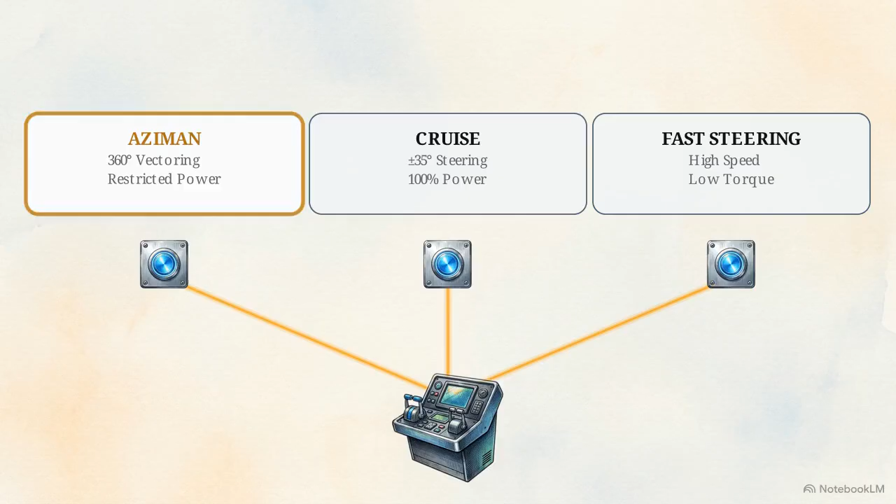The primary inputs on this console dictate how the ship steers and powers itself, relying on three specific mode selections: Aziman, Cruise, and Fast Steering.

Selecting the incorrect mode during alongside maneuvering poses a severe safety hazard, threatening both the vessel and the surrounding port infrastructure. These buttons do not pull mechanical cables, physically actuate hydraulic valves, or throttle fuel.

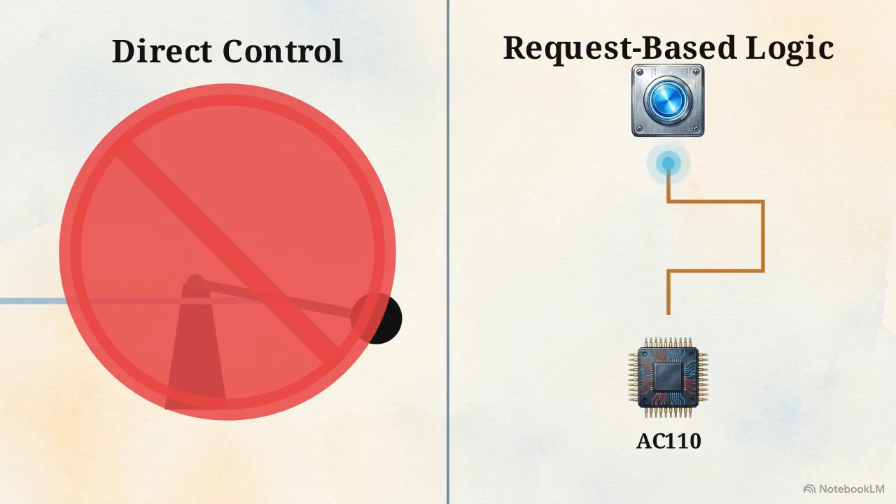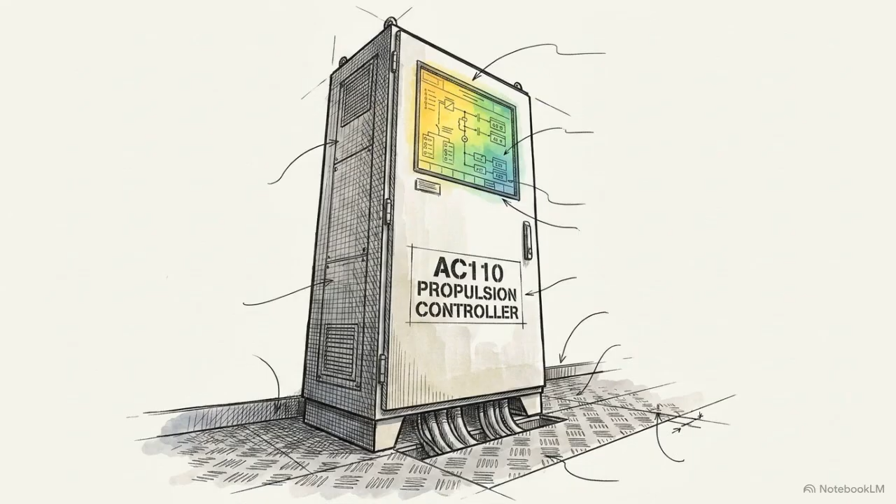They submit a request. The true authority over the vessel's movement resides in the AC-110 propulsion controller, a master logic cabinet standing between the bridge's request and the physical plant.

The AC-110 intercepts every command. It identifies which operational mode is currently active, calculates the safety parameters of that specific mode, and applies strict automated physical envelopes to the propulsion hardware.

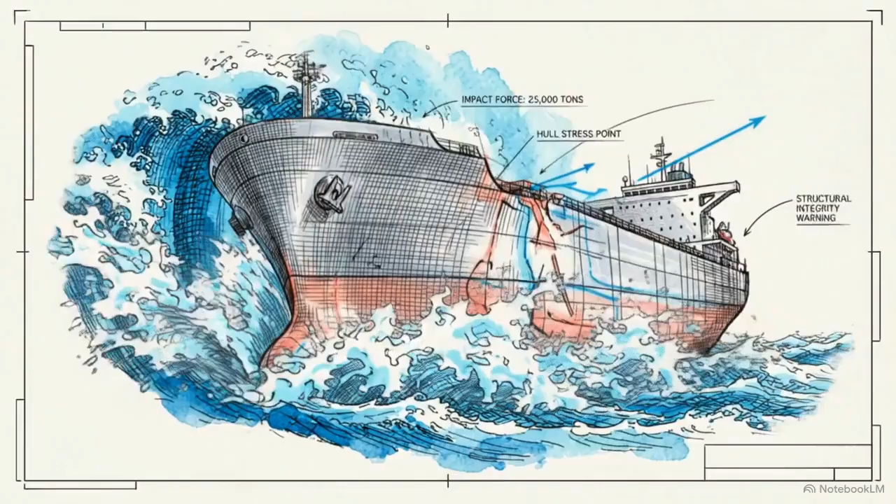This intermediate automation layer exists to ensure that human error at the helm cannot inadvertently tear the ship apart under hydrodynamic stress or destroy harbor infrastructure with a massive power surge.

Understanding exactly how the AC-110 calculates and enforces these operating envelopes marks the dividing line between a basic component operator and a principal marine engineer.

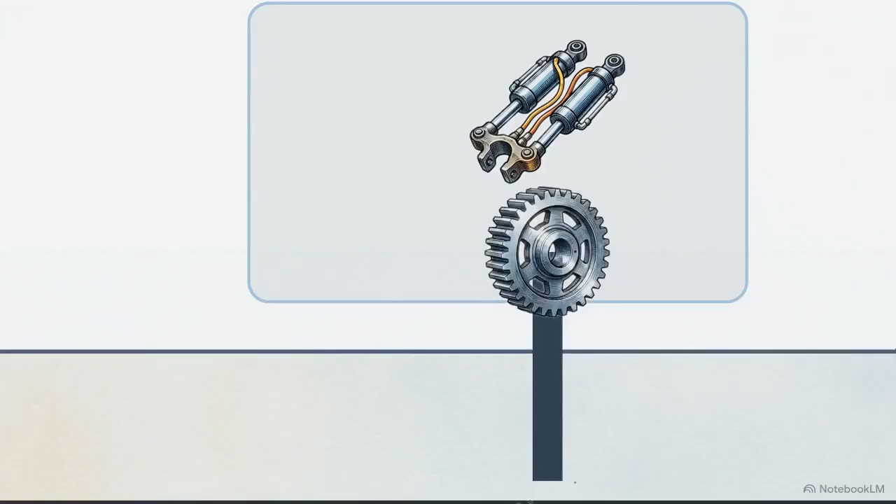Before analyzing software limits, engineers identify the hardware fallback, the Azipod room, situated directly above the submerged unit. This compartment houses the raw mechanics: hydraulic steering gear, slewing wheel, and winch motors. Adjacent is the AIU, housing ASU30X-D servo controls and override levers.

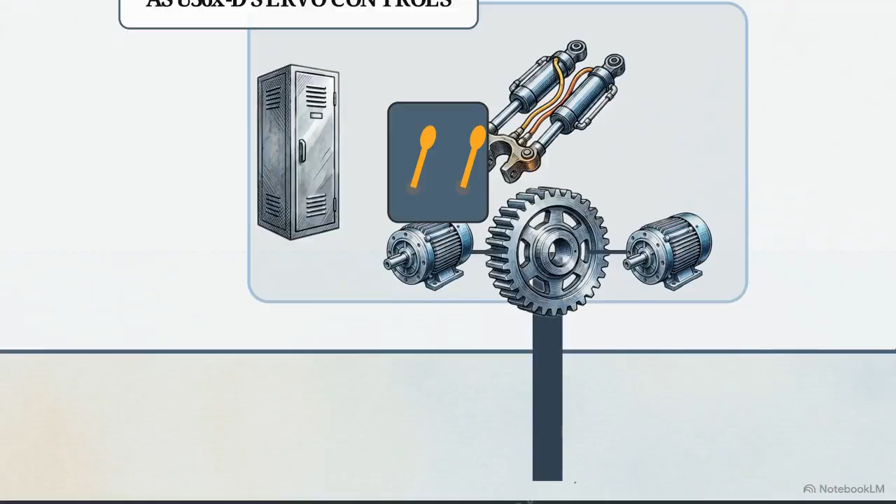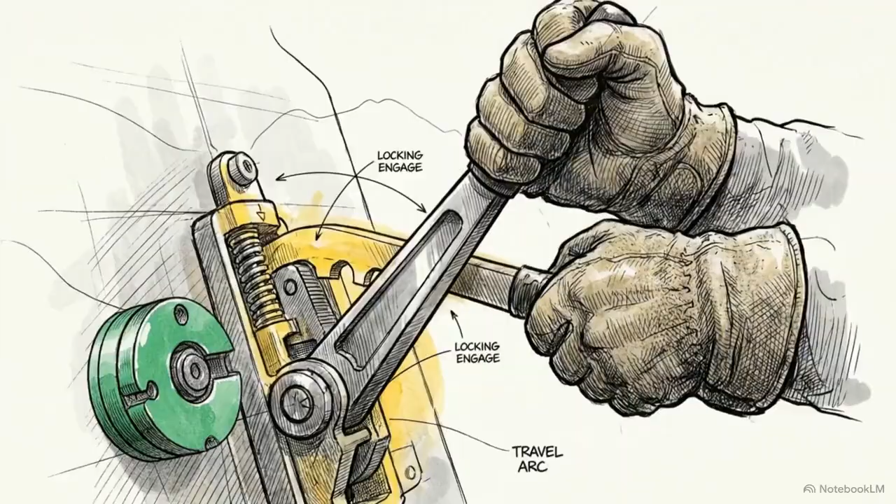If the bridge's remote control network fails or the AC-110 logic crashes, all operational command safely routes to this specific room. Engineers in the Azipod room physically bypass the AC-110, using the local interface to directly actuate steering hydraulics and manipulate propeller RPM. The control hierarchy is absolute.

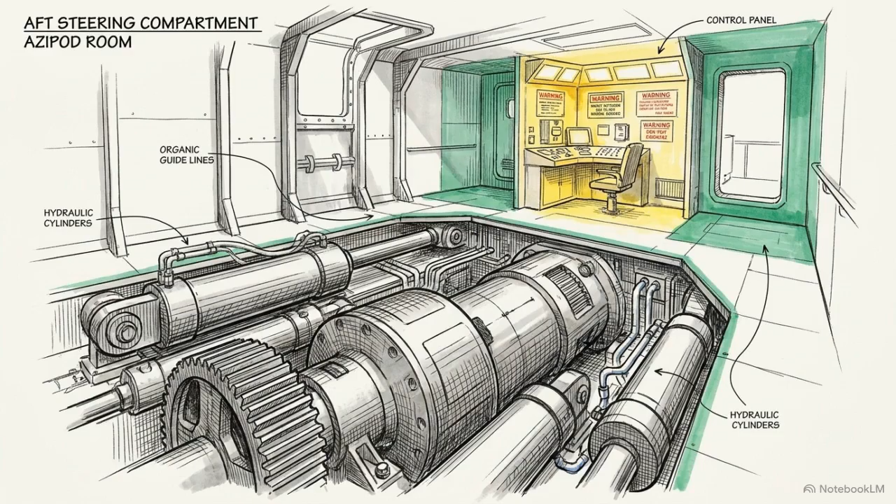A local hydraulic or electronic override initiated here strictly supersedes any command sent from the bridge. Automation logic manages the ship's routine transit, but the Azipod room provides the mechanisms for direct manual control of the propulsion plant.

When that vessel approaches a harbor, the operating environment shifts to tight, high-risk confines near concrete berths and assisting tugs. To navigate this space safely, the bridge selects Aziman, which stands for Azimuthing Maneuver Mode.

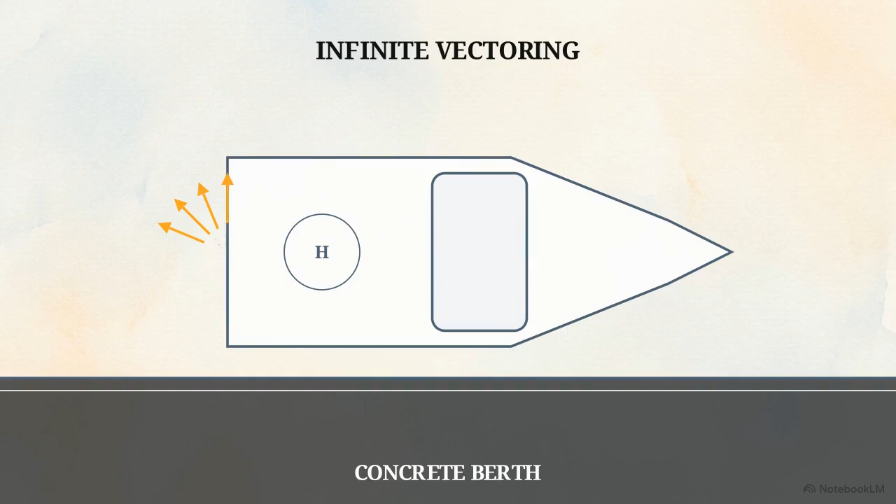This top-down schematic shows Aziman in action. The system enables absolute directional freedom, authorizing the pod to rotate a continuous 360 degrees, vectoring thrust in any direction.

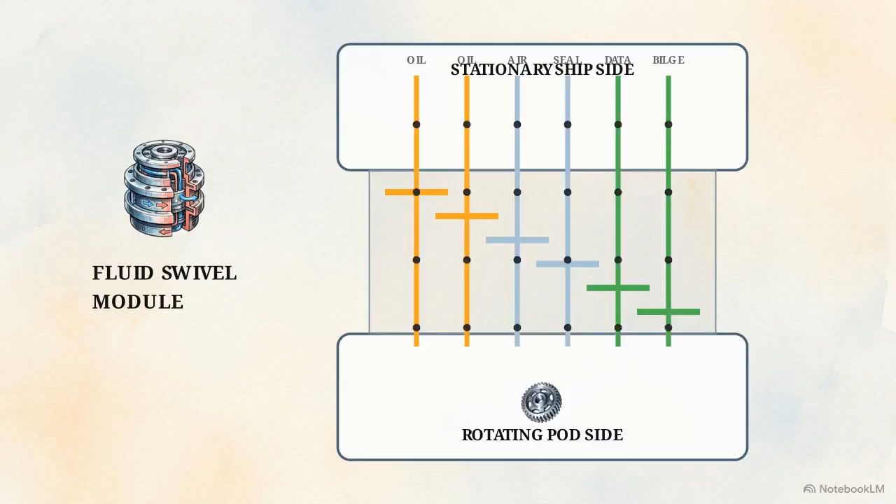This is mechanically enabled by the fluid swivel module, maintaining unbroken hydraulic and data channels during endless rotation.

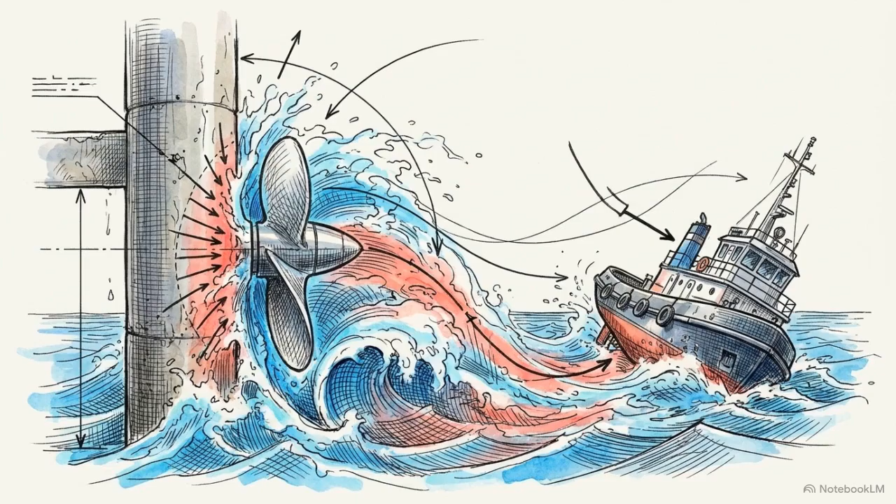Infinite rotation introduces a critical danger. If the pod is aimed sideways toward a berth, a sudden surge of full nominal power would generate extreme propeller wash, destroying tugs, docks, and nearby structures.

To prevent this, the AC-110 applies an automated safeguard. This chart tracks allowable power. In Aziman, the system permanently caps maximum propeller power output below the physical limit.

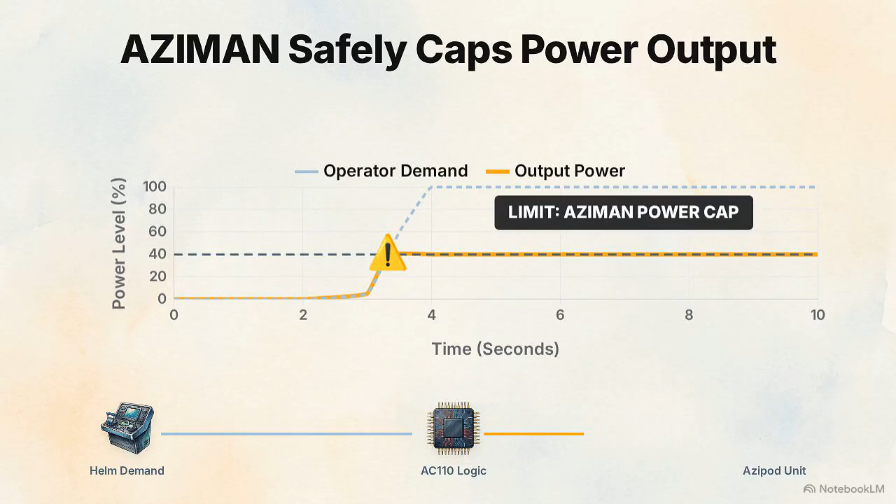Even if an officer slams the helm to 100%, expecting immediate power, regardless of the operator's intent, the automation system categorically denies that full power request.

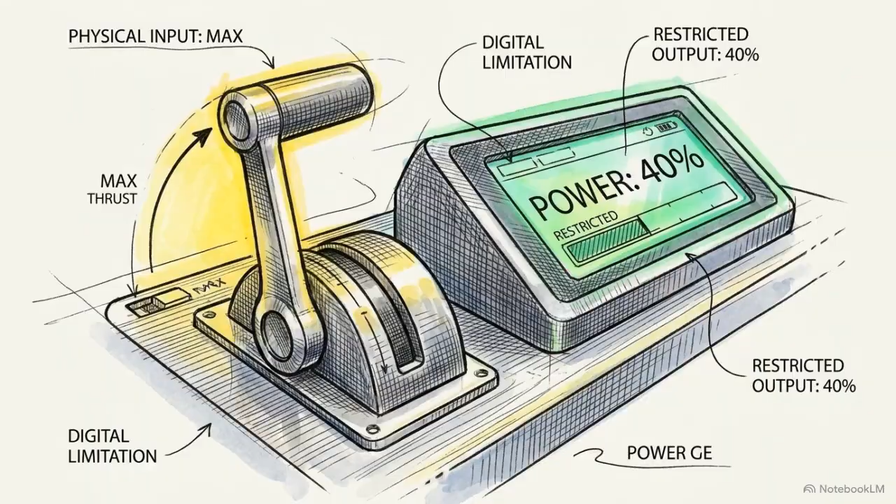This restriction is hard-coded safety logic, deeply embedded in the system. The operator cannot manually override it from the bridge console. Aziman intentionally trades power for absolute freedom of vector geometry, strictly to protect external infrastructure.

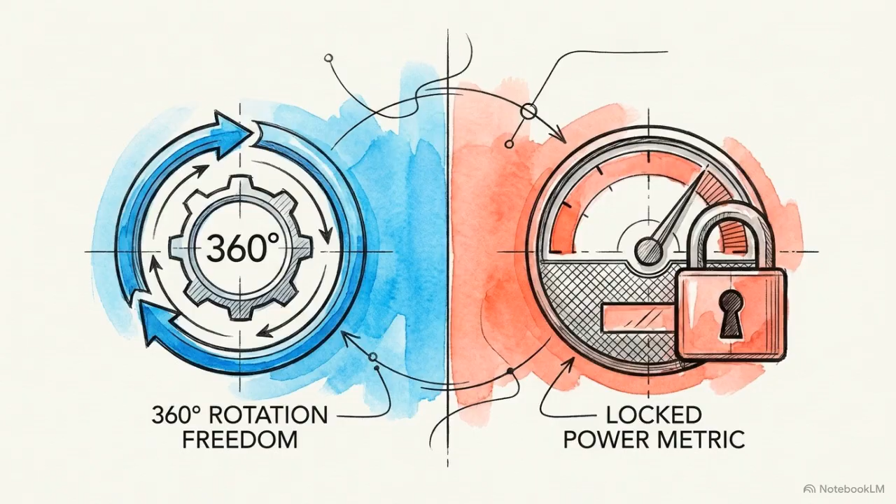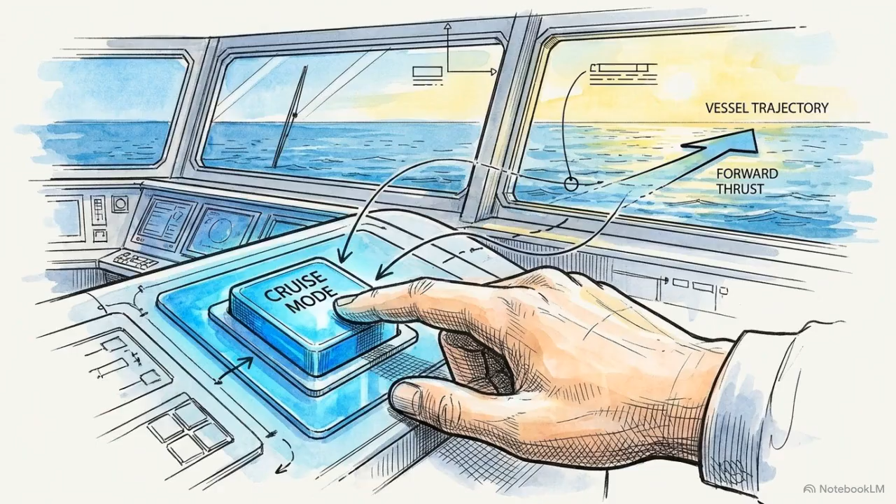Moving out of the harbor, the vessel transitions to high-speed transit in the open ocean. Here, the bridge selects Cruise Mode, or Open Sea Mode, which applies an operational envelope that is the exact inverse of Aziman. Cruise Mode enforces a strict hardware restriction.

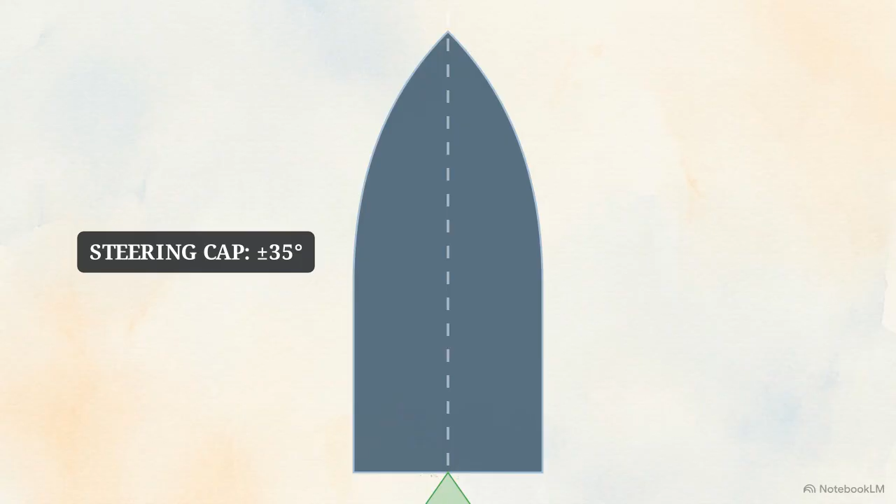The steering angle is firmly capped at exactly 35 degrees port and starboard. Hydrodynamic physics dictate this limit. Turning a massive pod fully sideways at high transit speeds generates catastrophic lateral roll forces against the hull.

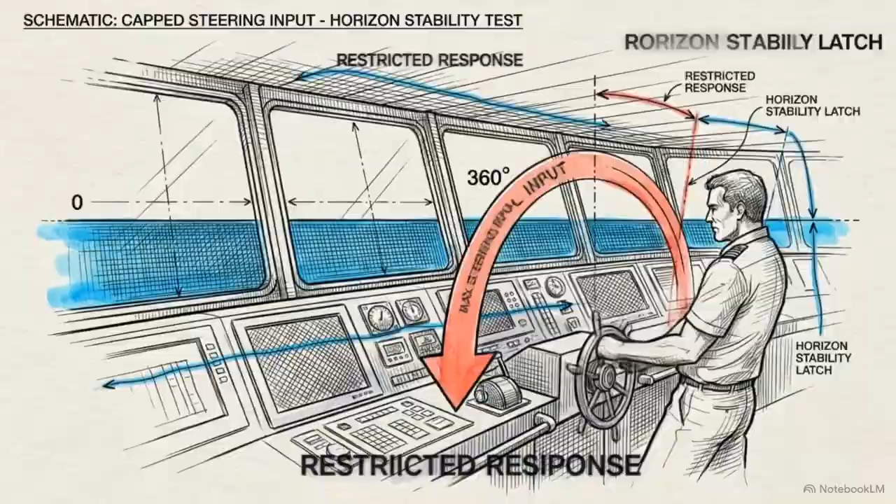By locking the steering angle, the system prevents the vessel from unintentionally capsizing itself due to a drastic pilot error at the helm. Because tight maneuvering is no longer required in open water, the trade-off is clear.

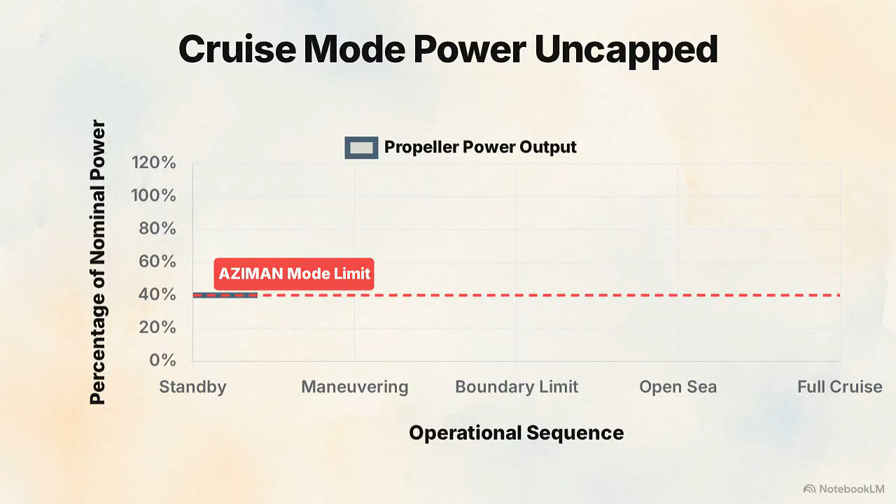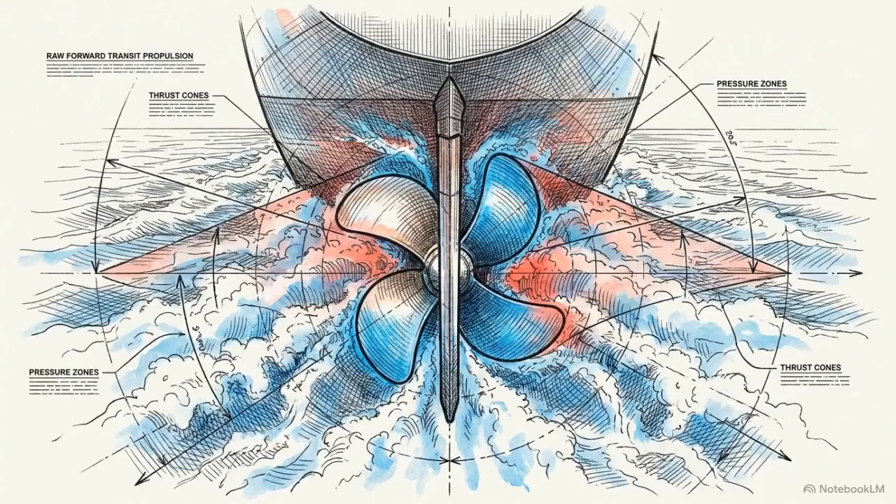The previous Aziman power restriction is completely lifted. Returning to our power chart, the output ceiling breaks entirely. The cycloconverter is now authorized to deliver 100% of nominal propeller power upon request. What the bridge loses in rotational freedom, it has gained in raw forward transit thrust. Cruise mode guarantees structural survival by sacrificing extreme maneuverability to safely unleash maximum power.

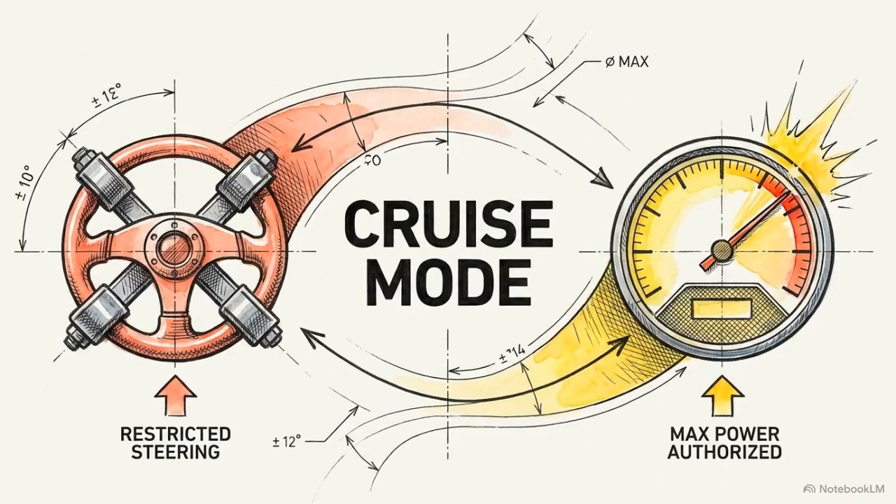The propulsion logic system is a rigid, unyielding matrix of automated rules, not a series of fluid suggestions. Bridge buttons do not control the Azipod directly. They select one of these inescapable operational envelopes.

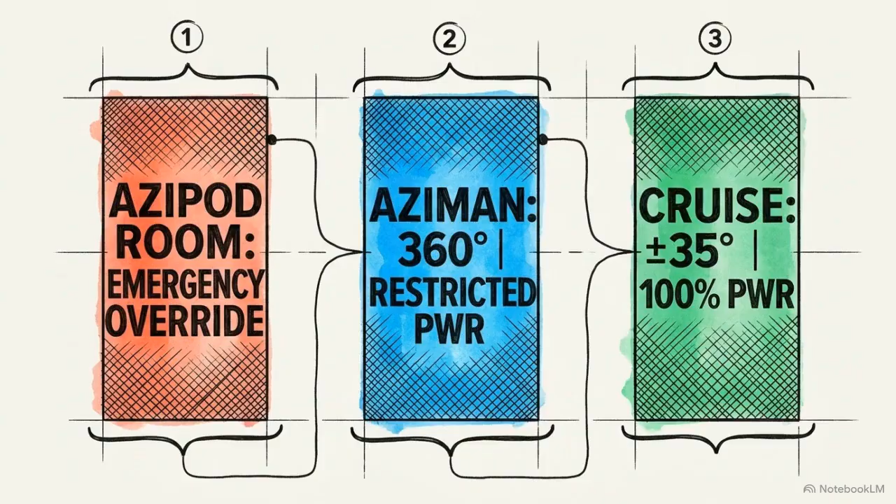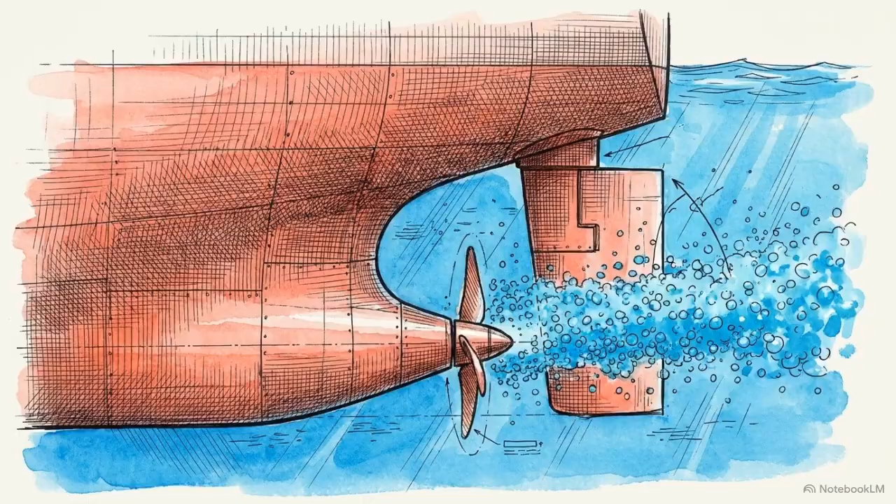Aziman mode grants unlimited vectoring while limiting power to protect the harbor. Cruise mode grants maximum power while limiting vectoring to protect the ship's hull. And the Azipod room serves as the final physical override when all remote logic fails.

Knowing these absolute boundaries separates a technician pushing buttons from an engineer who fully understands system limits. Mastering these automated envelopes forms the foundation of marine electrical and operational command.

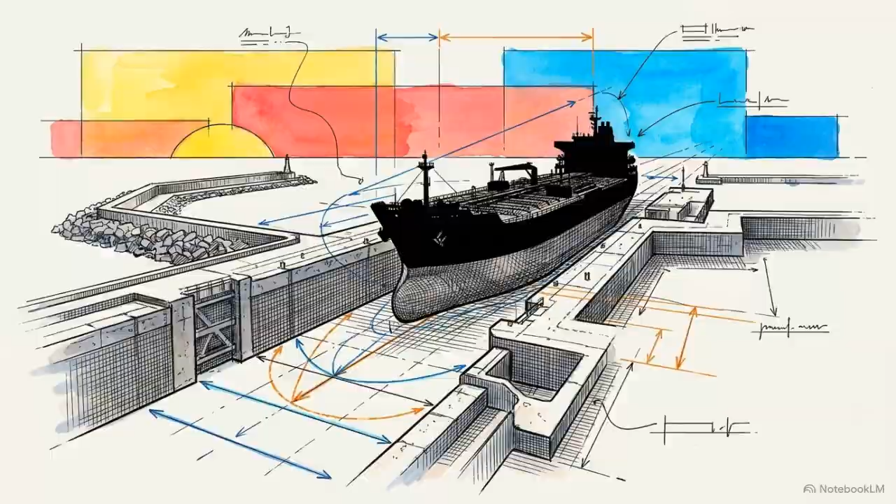Next time, we decode fast steering gear mode and map the critical feedback loop differences between follow-up and non-follow-up control.